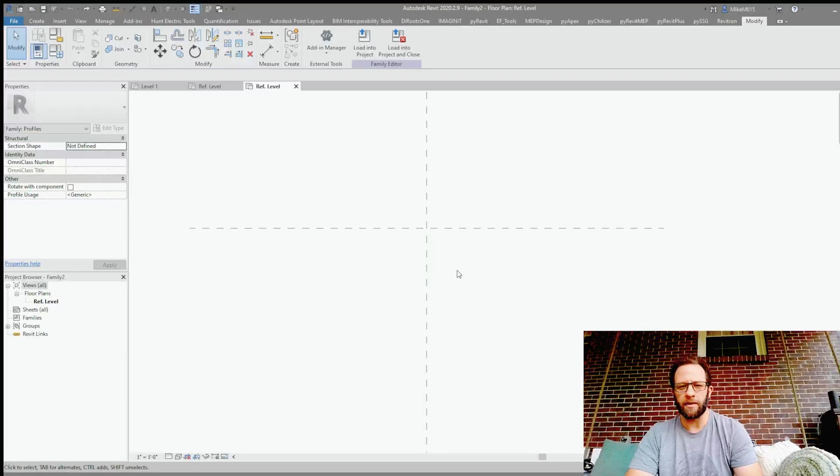All right, so in here I have got a blank profile family that I've already opened up, and inside of this, we're going to skim through the basics because I assume most people jumping into this video, if you're actually watching through all my awkwardness, you're not a basic user, you know some of this stuff. So if I'm going too fast, I apologize. And if you want to follow up with a question afterwards, let me know. Otherwise, there's a ton of good resources on the basics, and I don't want to delve into those because they're well covered.

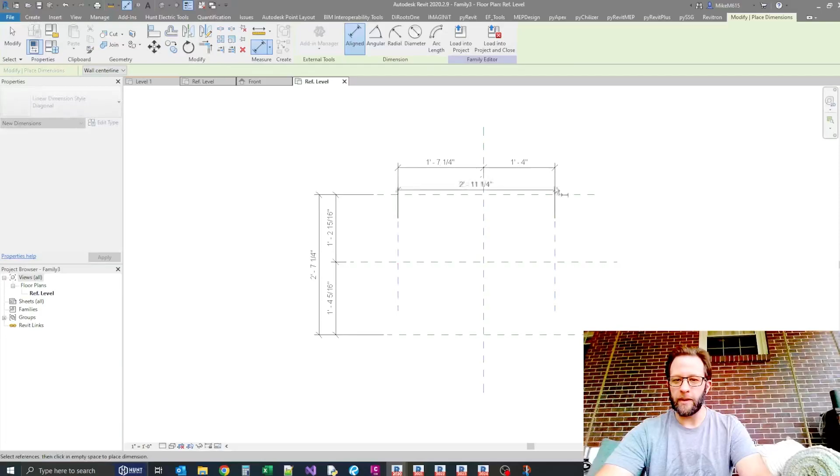Creating my basic profile reference planes here. Skimming over this stuff because, again, this shouldn't be where we're looking for value today. If you're looking for more basics, there are a bunch of great videos out there. If you have any questions on it, I can refer you back to it after the fact. Change this value.

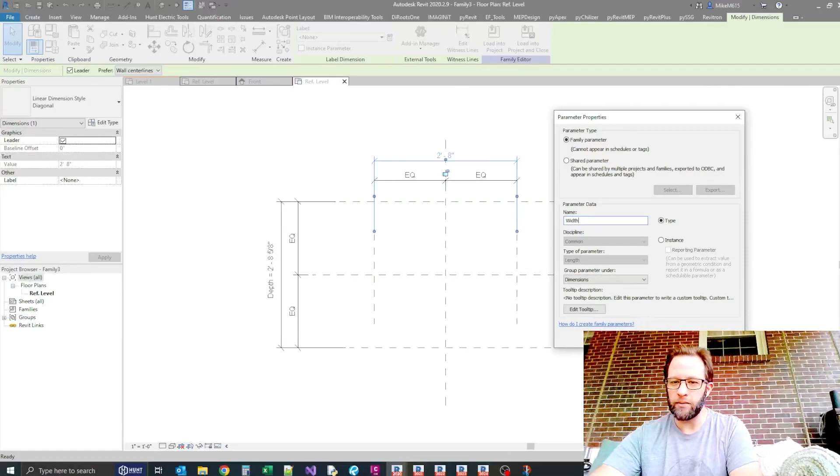Okay, in a profile, one of the important things is that they must be a type parameter. Regardless of if you change it to instance, you're not going to see it in the family that you nested into. So always leave it as a type. There's no reason to change it. It just becomes an encumbrance.

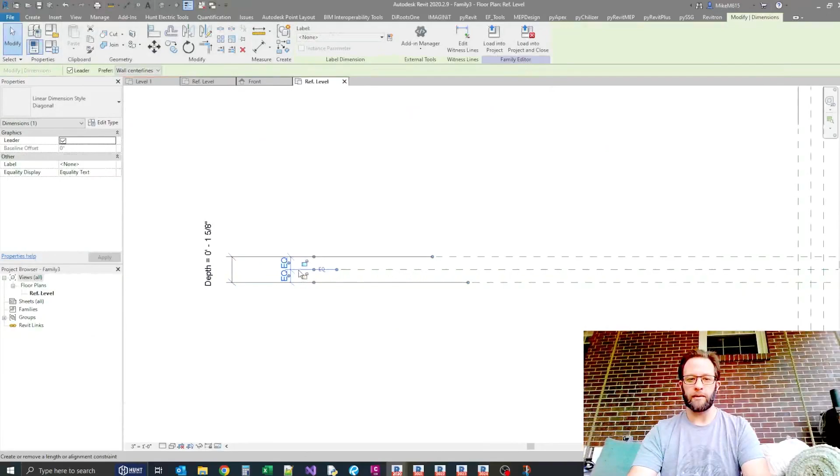Another thing I like to do with my dimensions is I'll come up to edit type here, and then under dimension line snap distance, I will change that to 1/4 inch and just make it easier so I can drag these to a typical distance apart from each other. Just a handy little tip right there.

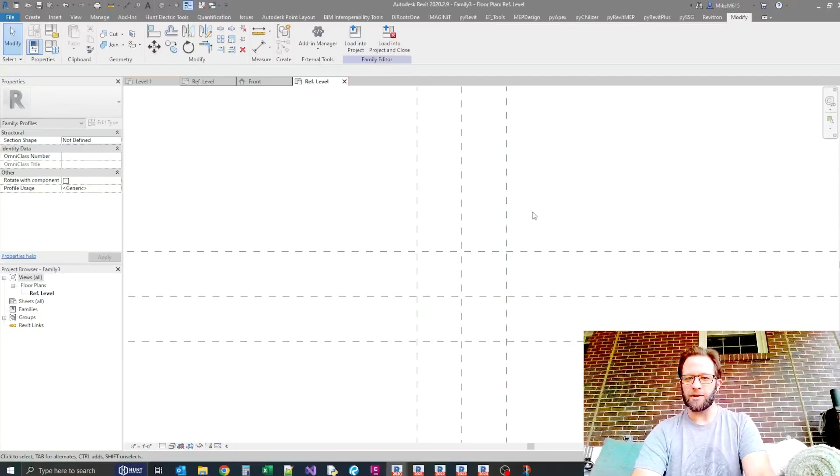Okay, so now I'm going to just brush through putting in some other ones. We're not going to associate anything to these parameters, and some of the values aren't going to be true. I'm just going to throw them in there just for ease, and I'll probably speed up through this portion so you don't have to watch me do some of the mundane. Right, so that should be the basics of my shape. Now let's draw some lines.

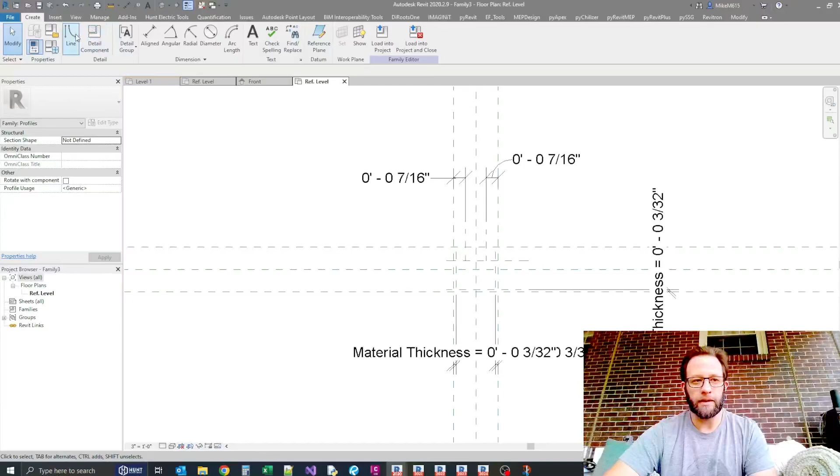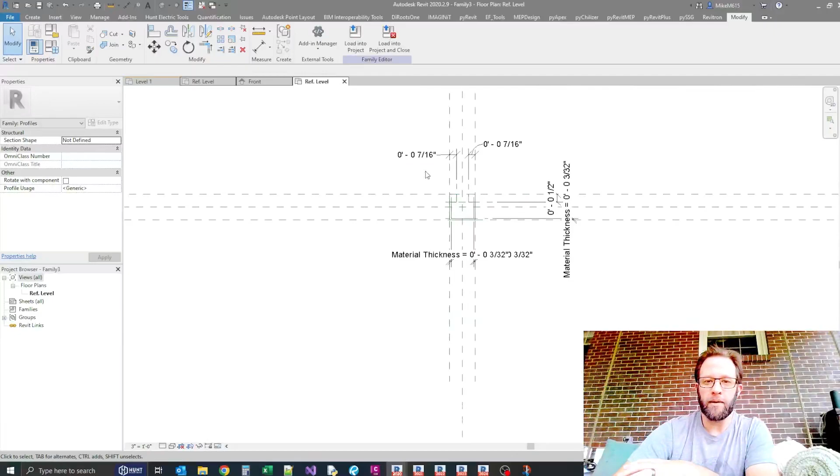And as you're going, if you can be sure of the reference plane that you're associating to, just go ahead and lock it at that time. I'm going to go ahead and fast forward to this instead of just basic steps. This is really all that this family is ever going to be. Again, you want to leave those as type parameters. You're going to want to be able to set these to true values yourself, so do some research to what that is as well as that depth.

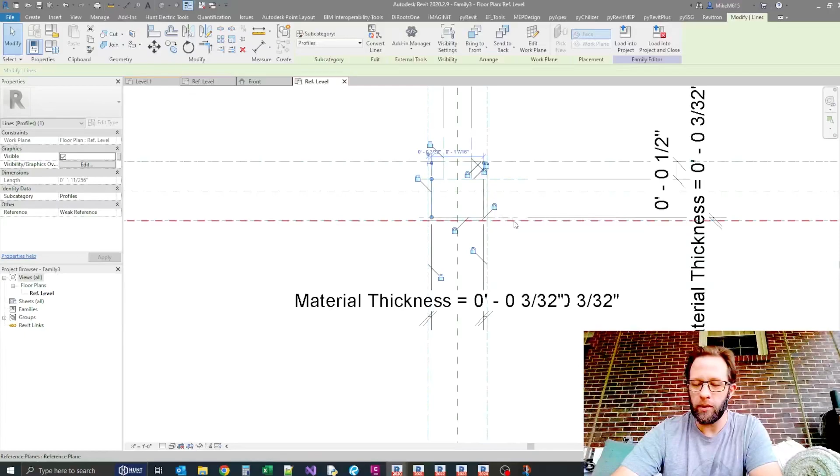Now, this is only a medium view, meaning that even if I associate yes/no parameters to the visibility controls here and turn them to only medium and then tried to put a fine profile in here, those lines would be overlapping even if you toggle them off. When you load it into the family, it will break things. So you're going to have a fine, coarse, and medium version of this. The coarse you can typically just do in the nested because it's just a square at that point, or a rectangle. You don't have to have a profile for that, but you do the same sweep method with it to make it associated to a line.

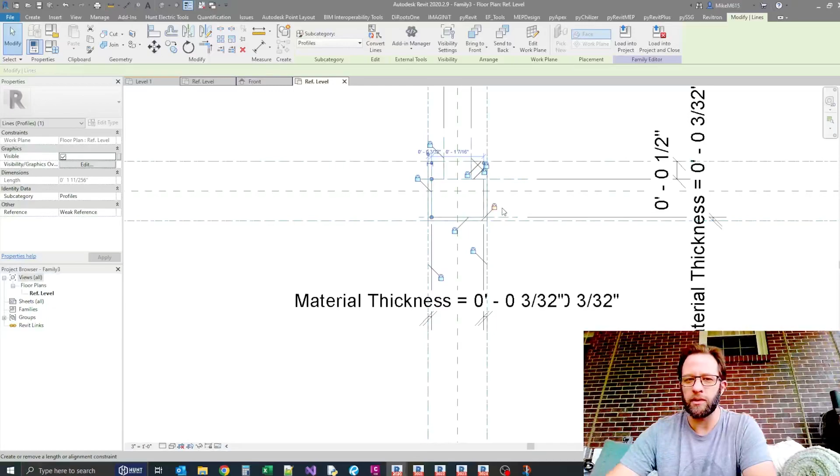Now, because we're done with that, I'm just going to close it and load it into family 1. This is my nested family. I'm not going to save any changes here. Now, we need to do a little bit of prep work in here. I'm going to generate my length, add some dimensions, equal constrain them.

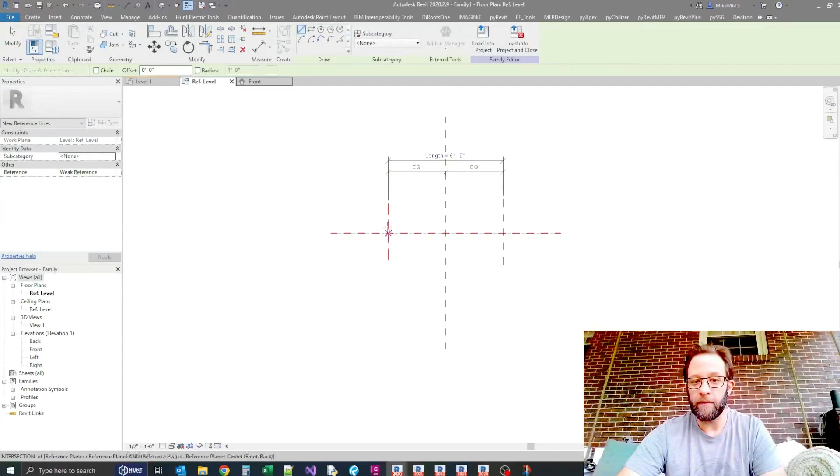I've already preset this one up with a template, so it's got some built-in stuff. Now I want to create a reference line. Now that reference line is important. It starts from here. Typically, I'd associate it to a reference plane if I had a moving AFF with it. In this case, I won't because this is just going into a nested, so it doesn't need that complexity.

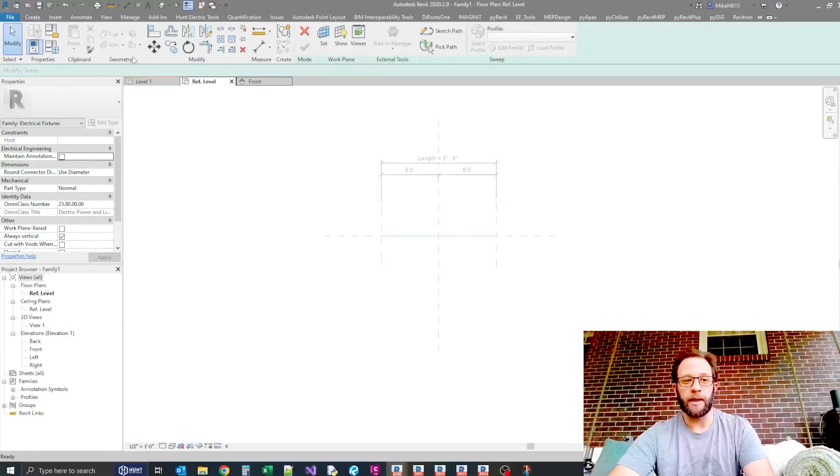Lock it to this reference plane, but then I also want to hit AL, lock the end of that line to here. So at that point, I'll come up and I'll create a sweep. First thing we want to do, because we've already pre-drawn that line, we want to use that as a path. We'll click that, hit OK. And now because we've already created a profile, we can just choose our family, which is family 3 for this, and then hit apply, and we're done.

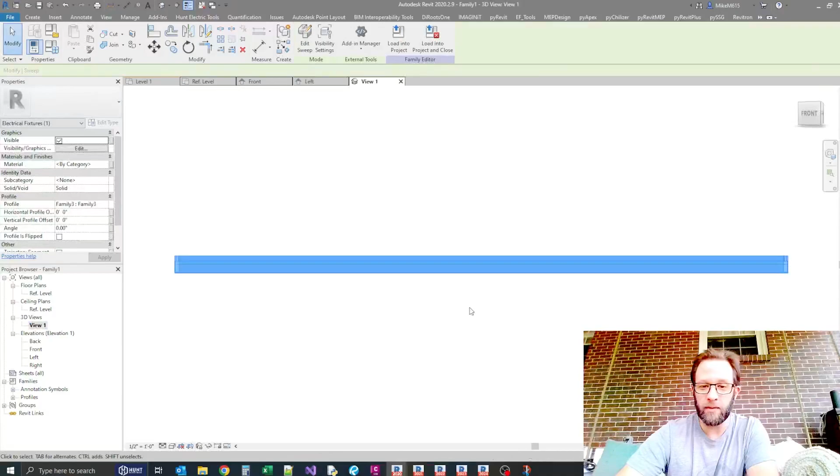If we go to a left view now, you'll see we've got this basic extrusion. If we go to a 3D view, you see that profile matches that length that you've given it. Looks good, right? Now, a couple of issues here is we need to be able to go left, down, up, right with this. So we need to build in some movements. One way of doing that is you've got this angle up, and with 2 yes/no controls and an angle control, you can make this move all directions very simply.

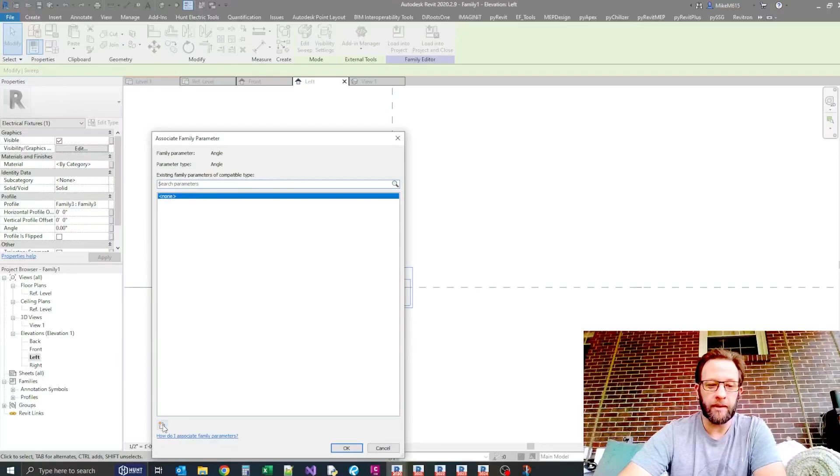So what I like to do is, because this is already here and I can associate, this acquires the type immediately if you go this way. I'm just going to create a new parameter. Typically this would be a hidden one for me, but I'll just name it angle control. It needs to be an instance. I like to have controls under constraints, hit OK, hit OK.

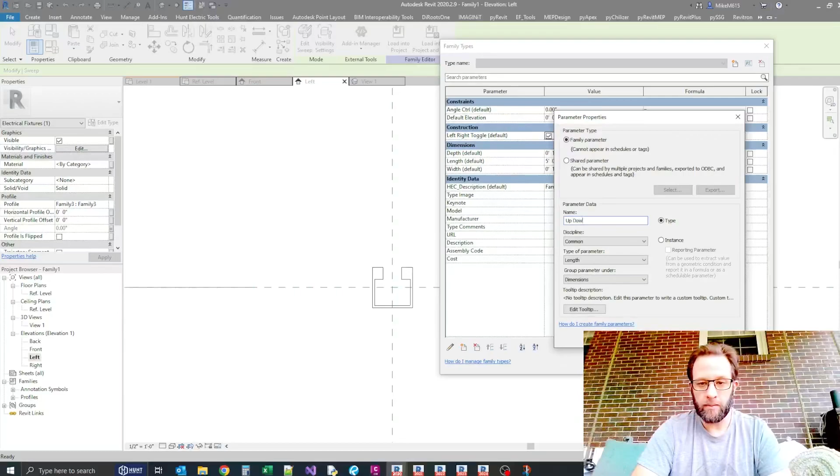Now if I come into my family type, create 2 yes/no controls, I'm going to call left, right, toggle. I'm going to copy that value so I can cheat later on. Put that one in construction. We're going to do this one up, down, toggle instance as well. So now we've got these created. This is created and associated to this. Now we need to add some logic. To do that, we're going to do an if statement plus an if statement.

The simplest way I know of doing this is because we know we've got to move 90 degrees to go left or right of its current position and 180 to go up or down. So one of the easiest ways I can think of to putting that together is this if logic. So if... So with both checked, we're sitting at 0. If we want to go left and right, it's a 90-degree move. We hit apply, it'll rotate. If we want to go up, down, it's going to add 180 degrees on that, right? So taking it into the left position.

If we turn off that left-right toggle, it's going to go into the up-down now. It's a little bit confusing on how you can put this together. This just gives the 4 options based upon checked, unchecked, right? It's just adding values one to the other. You can get a little bit more in-depth in this to make sure that up and down is always up and down and left and right is always left and right, but it just takes a little bit more form to that logic that you're putting into the control here.

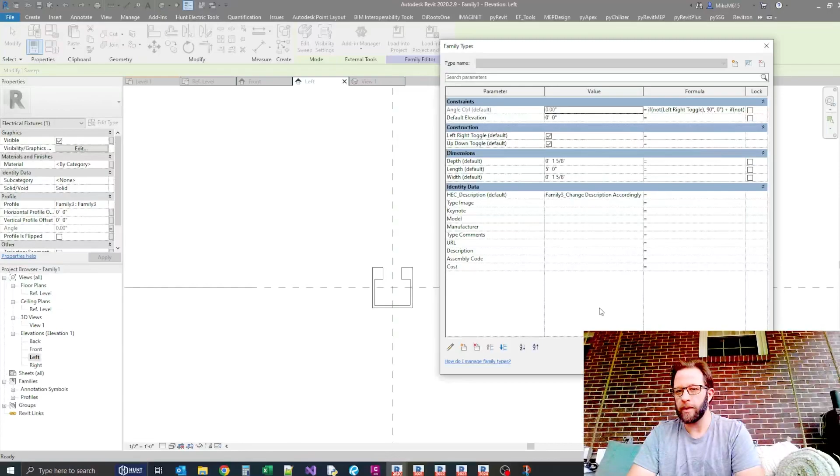Overall though, now this is fully functioning and moving very freely on a work plane basis. So without any other toggles, you can change the work plane of this to go from horizontal to vertical. So already very lightweight, very easily moved and manipulated.

So now we get to kind of the data side of it. We need to create a lookup table, and I'm just going to go simple. I'm going to name it lookup table and hit OK, and then you go to manage lookup tables and you can import one. I've already pre-made one, it has to do with something else, so we're just going to use that file. The way this is set up is in a lookup table, I have columns. I will always validate against column number 2, ignoring number 1. Number 1 is a blank column. You can use this for your descriptions.

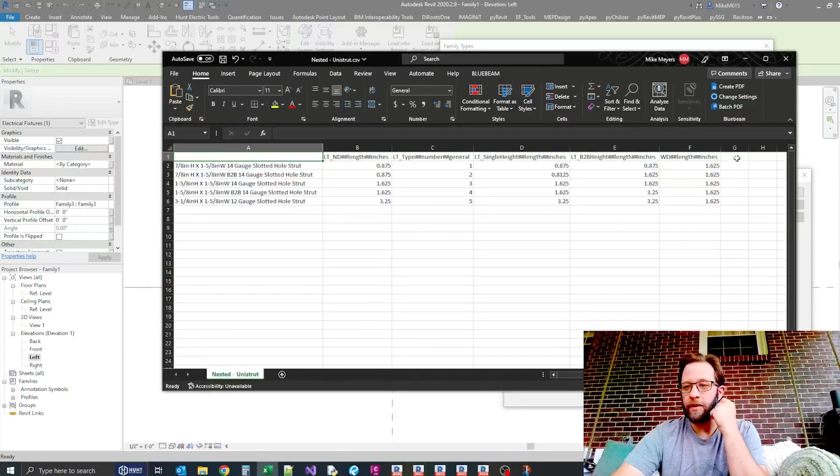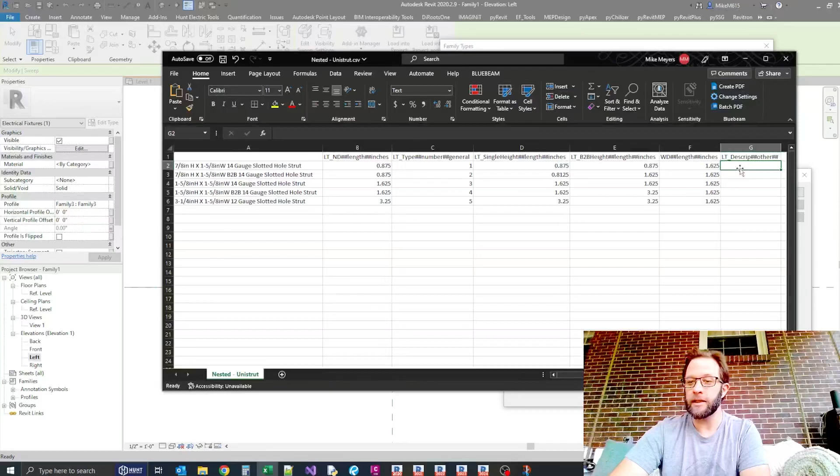You can also do string and other fields with some manipulations. Basically, you define, here's my parameter name. I'm using LT just for lookup description, and then descript, and then let's make that other. The most important part of this is for each of those cells that are going to be part of that, you need to change it from general to text. And this can be anything you want. This just needs to be text.

Back more into this if you want to be able to account for back-to-back, but for now I'm just going to leave it at that. And now that should update to match a size that fits within that file because it's looking at depth, inch and 5/8 sat in that file, so here's inch and 5/8 and description based upon that. This is pointless because it is the same value regardless, but just another example of it.

So now we're looking at the width, which in there is always inch and 5/8, so this is the value it falls. It's just locking it to that. It doesn't need to be that whatsoever. But if you're needing to adjust things, you can control it through that. So if ever you need to worry about thickness, you can associate it the same way and drive that through a lookup table. So you're getting consistent information within your description, and this is an instance-based description that users can look at that, based upon their selections, can update, right?

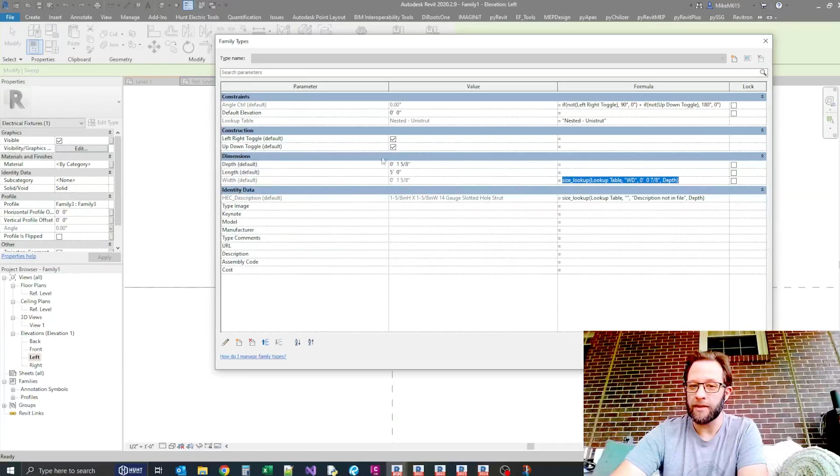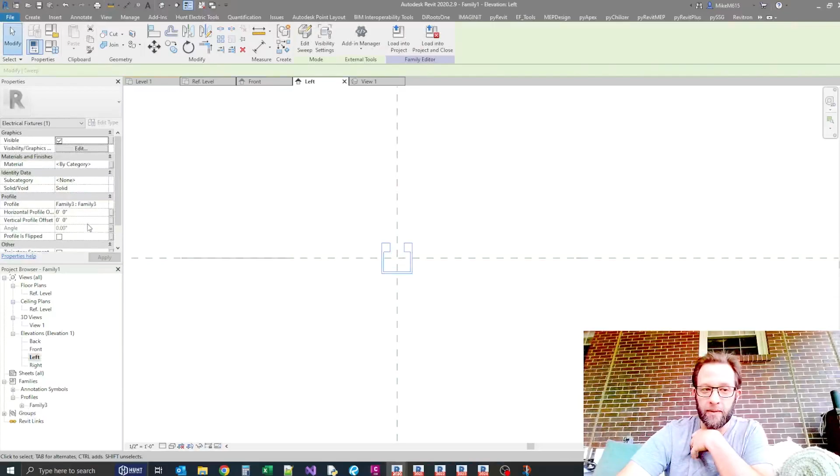So you could add another toggle for back-to-back. It would know if it's back-to-back, and so on and so forth. Again, this is just a basic overview of what a nested family should look like and be able to move and do the things you need to, right? So if I change this to 3/4 with this associated, this should move, but it does not, because inside of a profile, as I was talking earlier, if I click on this profile, you'll see that height and depth aren't in there. You think, okay, it's because it's a type parameter. Well, that type isn't editable.

So one thing that we have to do to get around that is if you come down to that family symbol instance, you'll see that those parameters are there, but I can't click and edit those whatsoever. So you have to interact with it with the API in essence. And how I've done that is through a Dynamo script. It's really close to the same as if you're associating nested parameters to the host parameter. There's just a minor difference to that script that has to be made to do this. So I'll just go into this real fast.

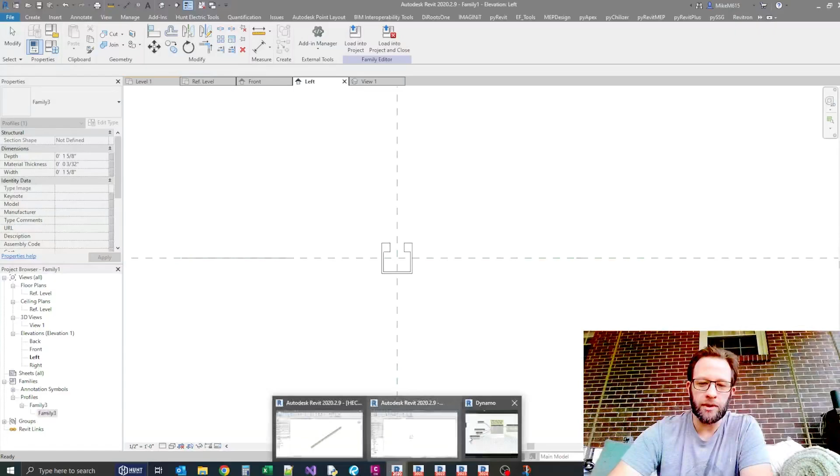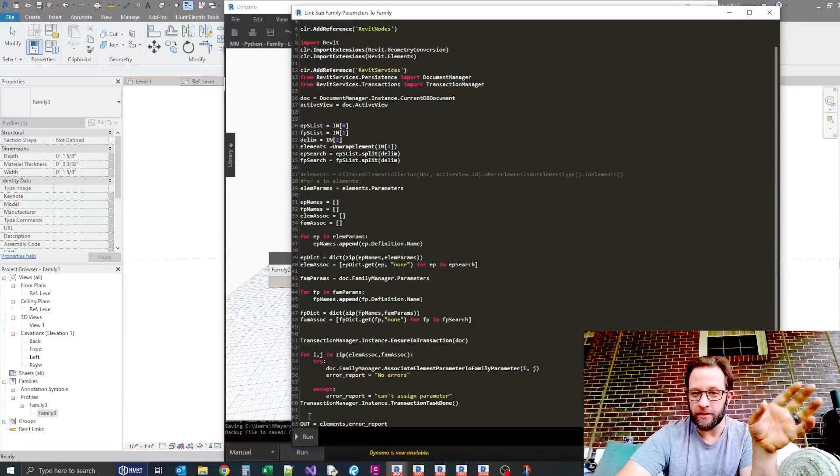In here, I want to join depth with width, and it's the same name in both files. So I've got the same input tying into input 1 and 2. If I go into this script itself, you'll see that overall it's looking for 2 different lists. Again, I'm feeding this same list into those 2 positions, so it's the same across. If I need a different, I'd split it out. Very simple script overall, only 63 lines, and some of that's junk even, right? So in here, I'll tie that in.

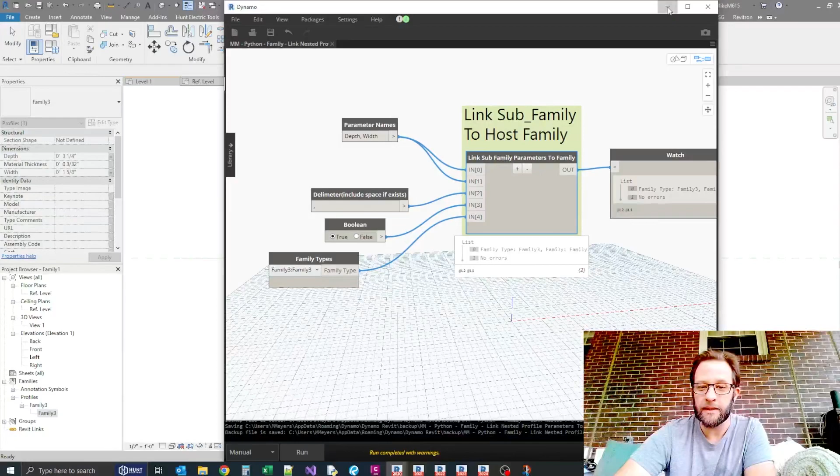I have to predefine what the profile is that I want to use, so I'll choose family 3 because that's what I just loaded in, and then I hit run on that, and I should get no errors. And then you'll see over here, I've actually got association built in here, and when I minimize this, the profile should be 3 1/4, which it is. So now you've not only got 3/4 strut or a size changing profile, you can also rotate that up, down, left, right. This will rotate in 90-degree increments each time, unless you're going back to that.

So very lightweight, very easy with a stable central point and lots of movement. This has taken me a long time to be able to get to this complexity, but with a little bit of change and a little bit of adjusting, this is a pretty good system. Now, it doesn't work for everything, but hopefully there's some excerpts in here that will help you out in what you're trying to do.